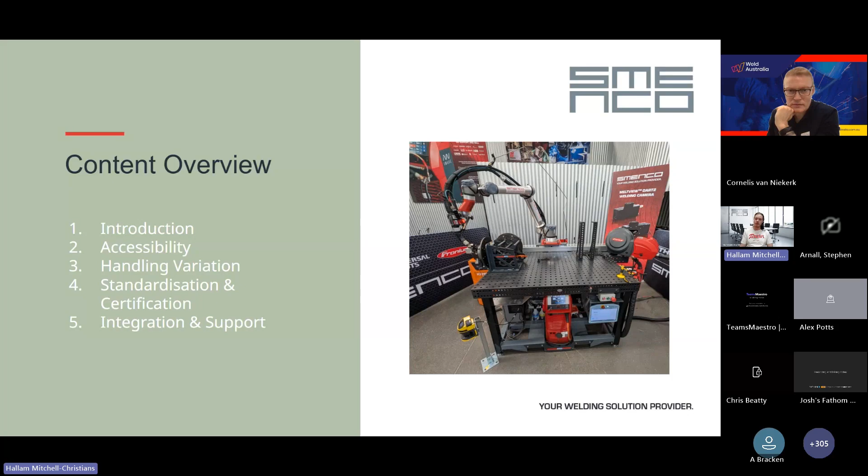And then finally, some challenges that we've been continuously seeing around integration and support. As a quick overview, we're here at Smenco. We're an Australian business, family owned, based in Melbourne. We are sole agents for a large range of welding adjacent products. At the very core, it's Fronius, and that tends to be with any of our welding solutions. But we also work very strongly with Universal Robots and technology partner THG to deliver turnkey packages for cobot welding, as well as selling to robot and cobot integrators across the country. And we've been doing that to robot integrators for the last 20 years.

And quick intro to myself. I am a robotics and mechatronics engineer. I studied here in Melbourne at Swinburne University. I've been in the manufacturing industry for about 7 years. And fun fact, I actually learned how to weld purely in the industry.

Are you on mute? You accidentally muted yourself, Hal.

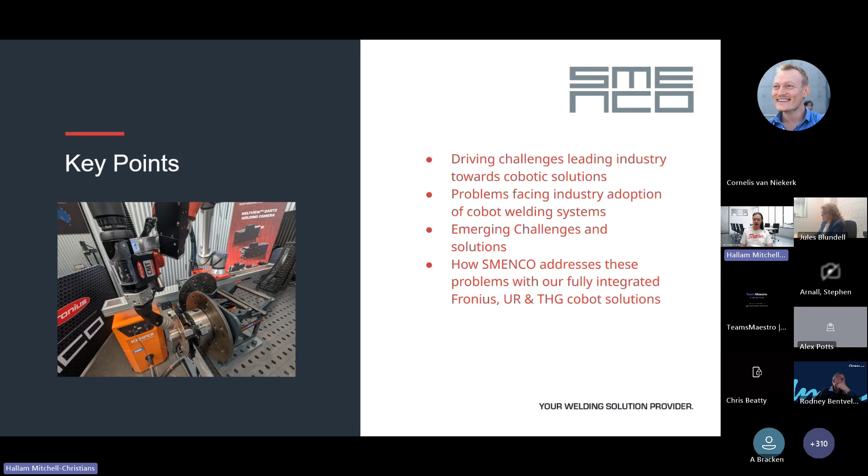The key points I'm going to be driving home with this are the challenges we're seeing, both from a solution point of view and an adoption point of view, and how we can address a number of these things with the solutions we're selling here at Smenco, and what's emerging with our product and technology partners.

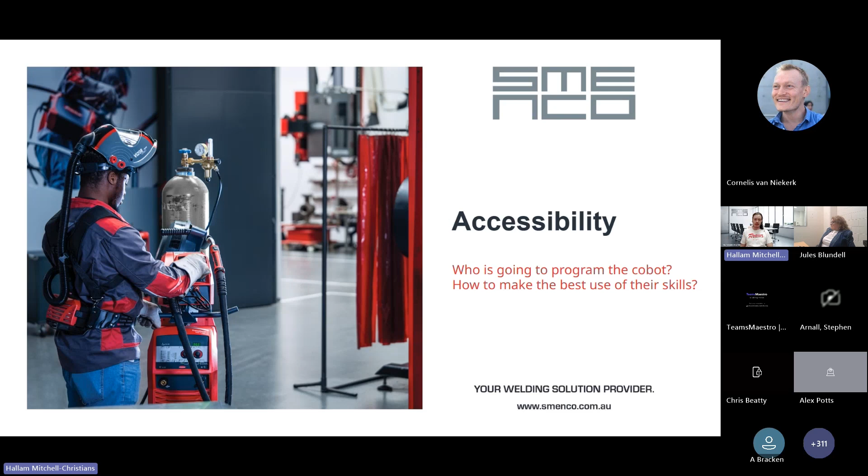So the first biggest point that's always really been the case with cobots is accessibility, and understanding who is going to be programming the cobot, who is going to be using it on a daily basis, and what sort of skills they need to actually make the most of it, and how can you leverage that.

Really, we still see the biggest driver around the adoption of cobots in the welding industry being the skilled labour shortage. Of course, there's a lot of different applications and factors involved there, but that skilled labour shortage is ultimately driving who ends up using the cobots inside businesses.

We find that a lot of our successful customers need to have someone that's first of all willing to actually take on that skill set, but the ideal target is someone that is a skilled tradesperson, welder, or boilermaker. There is some prerequisite knowledge there. They do need to be IT literate, but they don't necessarily need to be engineers, programmers, or anything like that.

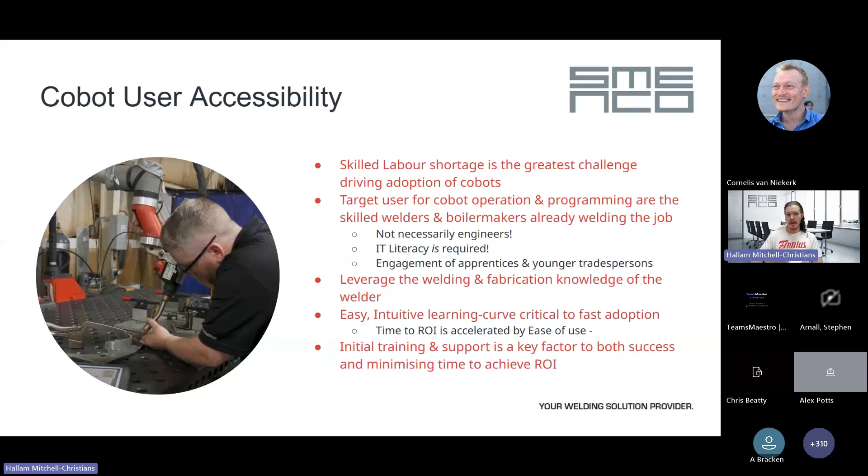Ideally, it's critical to be able to leverage that background of knowledge, that if they've been welding the parts a business is looking to automate, they need to be involved end to end of how that actually starts with the automation. A large part of this challenge of accessibility is a user experience or product design problem around how easy it is to actually learn and use the system, and that affects your time to return on investment.

I thought I had another slide in there.

That's right. Another area of challenges that we see as being really different from how industrial robotic automation addresses automation in general is dealing with high mix. Cobot welding systems are often sort of posed to slot in between manual operations and high-scale robotic automation, because with robotic industrial automation you tend to need low to no mix, high volume, high consistency, high initial cost in jigging to achieve consistent results.

This is all just to deal with challenges that manual welders themselves can visually, intuitively deal with. So this is the area where cobots need to be able to self-correct and deal with these challenges.

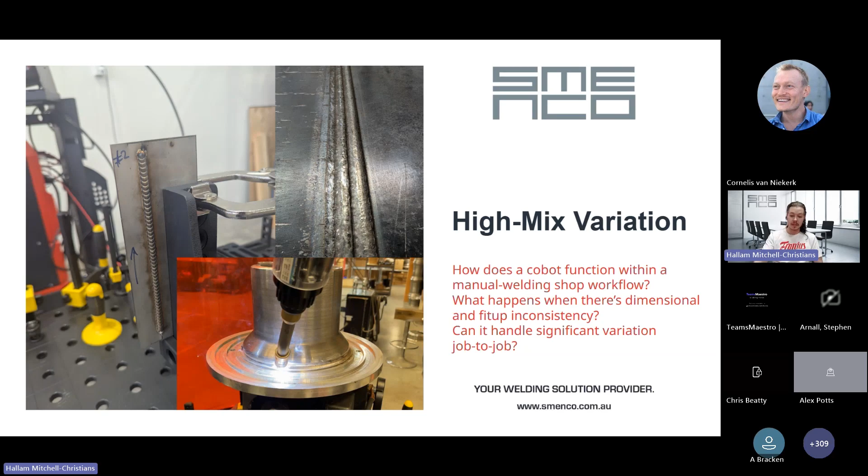As a result of this skilled labour shortage, so many businesses are looking to overcome the bottleneck that is welding before they can address any of the upstream processes that would normally really improve the consistency of an automated welding process. This might be CNC cutting, edge preparation, design for manufacture, that sort of thing. So the initial scope of welding with a cobot is often more challenging when it's a new business to automation.

Because they are using manual fixtures, they've got workpieces that are tacked in place, pretty loose fitment, and especially in heavy fabrication and some more general fabrication areas, you might have tolerances positionally for lugs, for braces, that sort of thing. There might be anywhere from 5 to 50 mil out of place from where it might be on a drawing or between parts, just because it's not actually critical to the overall design. And if that's something that is really easy to deal with from a manual perspective, and we're trying to introduce a cobot into that same space to just deal with that labour shortage and that productivity problem, we need to be able to deal with that on the cobot as well.

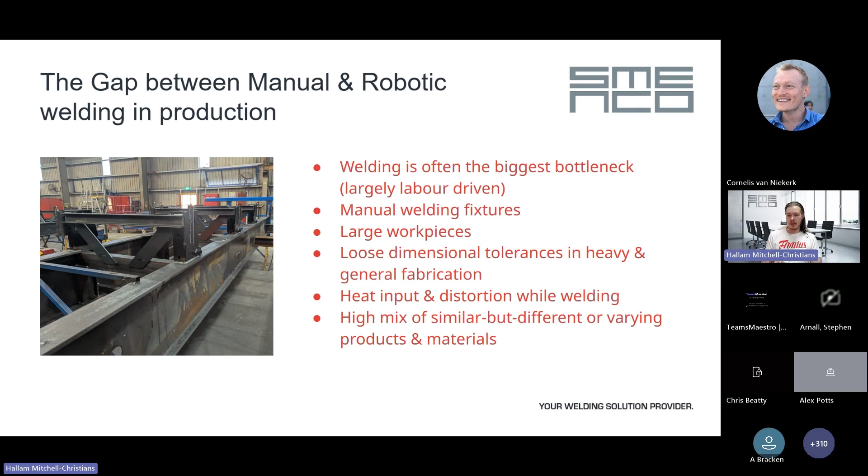Ultimately, there's a lot of different elements and ways that we can deal with these things. But one of the most critical ways we can deal with this with a cobot is just having an easy to use system that is still very flexible and can expand to needs. So if it's intuitive to use, with a low learning curve, the welder can teach the part and spend more time improving their upstream process before handing it to the cobot, versus just doing the repetitive welds themselves.

Another area that cobots really excel in, that industrial robots can't deal with at all, is being able to move a cobot up to a larger workpiece and automate large workpieces or small areas of large workpieces, that otherwise you would need an enormous scope of a weld cell to deal with, from both a safety perspective and a volume perspective.

Compensation systems are also quite critical here as well. Being able to use some more advanced functions that for us are available on the Fronius systems, on the CMT ready systems - using things like wire sense and touch sense to self-correct for variations in the fit up and seam preparation, and also compensate for distortion using seam tracking as you're welding along larger workpieces.

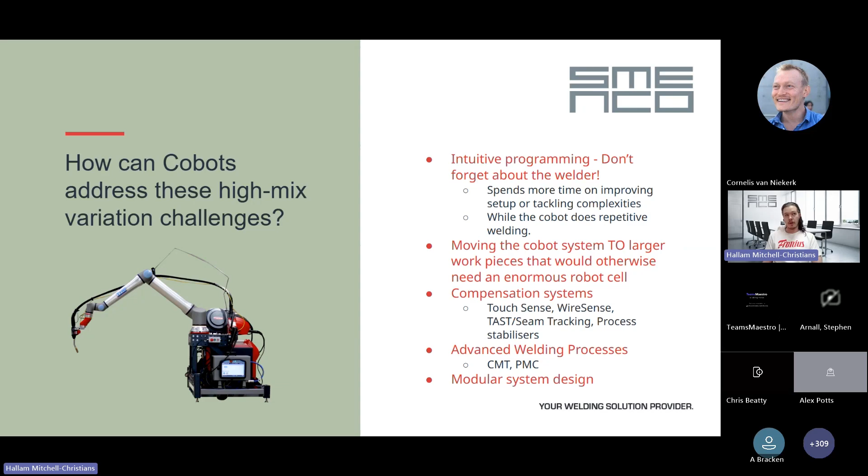Another more emerging area that we are seeing pop up more and more, not so much a blocker but a challenge in adoption for cobots, is standardization and certification around the welding process. This is more so around your WPS, and depending on what standards certain industries adhere to, in pretty much all those cases where they need to adhere to a standard, it's absolutely necessary to fully requalify procedures to move from a manual process to automation, which has a significant overhead when it comes to your quality staff, welding engineers, that sort of thing, to do that certification.

And that is something that we really need to be able to deal with, and we've got some emerging solutions here that we're focusing on going forward.

Utilizing more of the industry 4.0 platforms from Fronius, that's WeldCube. There's two variations here. WeldCube Air lets us reduce the amount of administration, management and complexity involved in creating and maintaining WPSs, and also deploying them to a fleet of systems for both manual and automation.

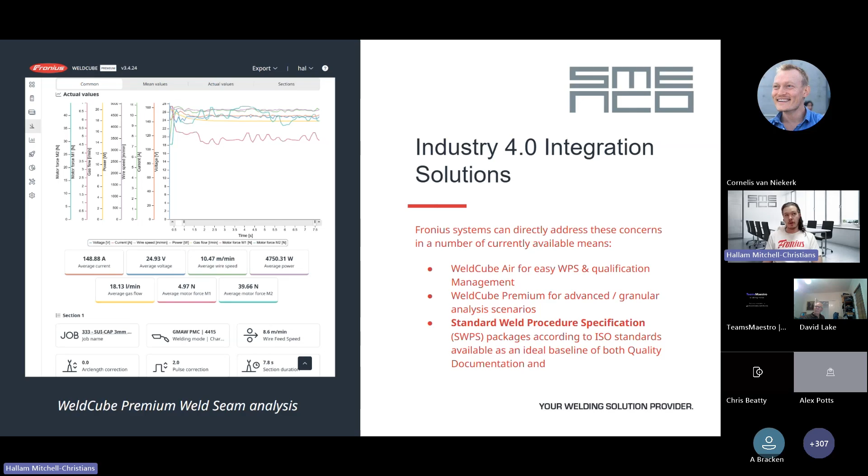And a final challenge point I want to discuss here is integration and support. Ultimately this is not a new challenge, but it's something that continues to evolve, and we still see it today. Companies new to automation rarely have the technical skill to integrate the robot themselves, and realistically, they shouldn't need to have those skills, from a safety perspective, and from just focusing on what the business does.

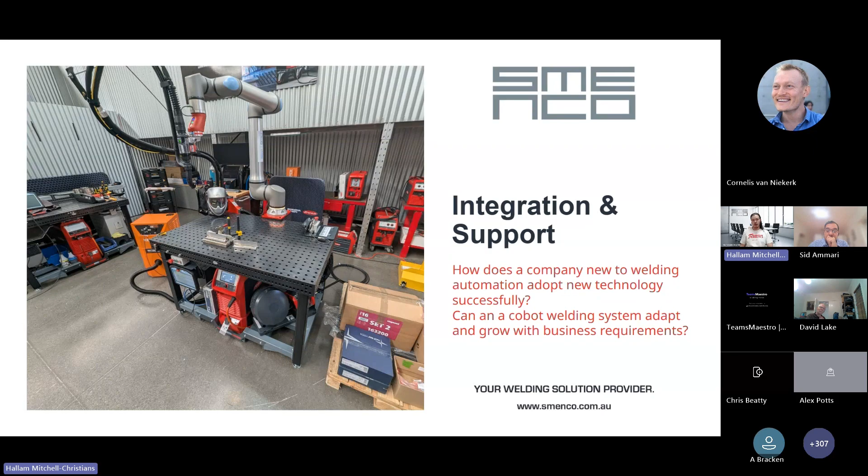Letting a business just focus on what they already know best, which is welding, fabrication, the manufacturing itself, not trying to reskill their guys just to set up a system. So support here is really critical when it comes to understanding that it's application first, it's welding first. It's not necessarily a robot problem, it's a welding problem. And if you don't have a welding process right, the whole system is essentially useless. So from our perspective, we always ensure that is the start point, making sure the welding is covered before anything else.

Another area where that initial integration and deployment makes a big difference is turnkey. Traditionally, turnkey might mean one size fits all. Our approach, and what we've found works best in industry, is that it's fully tested, ready to go on deployment, but still fully customized and flexible to application needs, exactly to the customer's requirements, and can be expanded as the customer experiences growth in their own knowledge, capability, and capacity to work with new work pieces, materials, and that sort of thing.

So that continuous integration support is essential to allow customers to expand, and to retain their staff as well. Making sure that the people we may initially train still feel confident and have the backing they need to move to some of the more advanced programming elements.

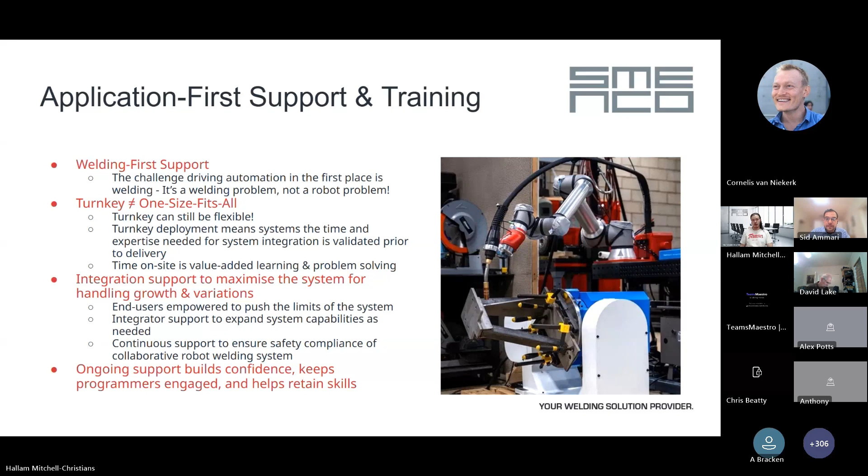So that ongoing support, on all levels, combined with the three previous points and a whole variety of other challenges we see, is absolutely essential. As a bit of a conclusion, the most successful customers we ever see are empowered to use their systems, empowered to take full ownership and do whatever they want with it, so that we can back them to expand their capabilities.

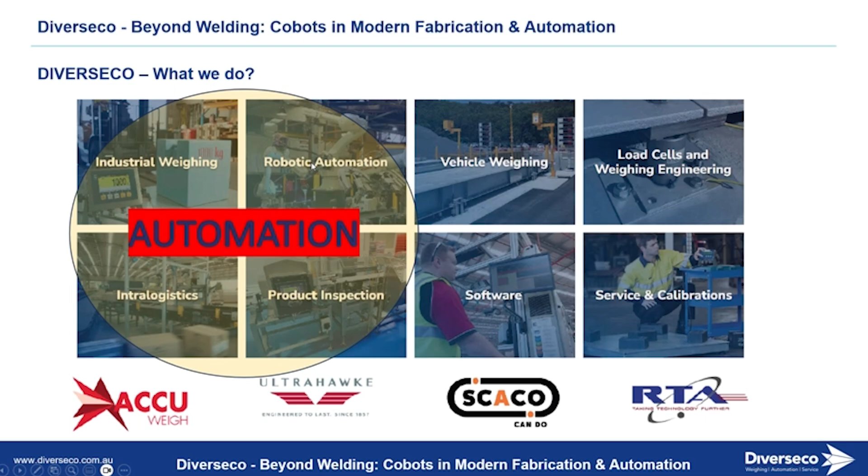Diverseco now, we are well known for two main categories. The first one is the weighing industry, with load cell product inspections, and the other part is automation, which falls under the robotic division. Within automation, we work in intralogistics, product inspection, robotic automation, and industrial weighing. Today we're going to focus on robotic applications, and more specifically cobots, as you all understand by now.

So a couple of words about the cobot. The first cobot was commercialized in 2008, so close to two decades now. And every year this market is growing bigger and bigger. The latest numbers say that in the next 5 to 6 years, we might 10x worldwide. So it's still a lot of application, a lot of things to do within the cobots industry.

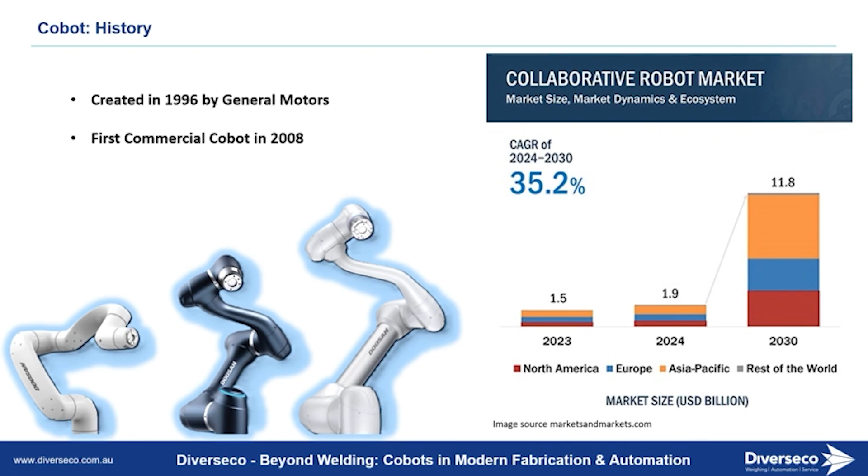But I do believe that in the past couple of years, maybe up to 5 years, the cobot has reached maturity. What do I mean by this? If you look at the capabilities of cobots 2, 3, 4, 5 years ago, we were pretty much limited by a couple of characteristics. A cobot can be defined by 2 characteristics: the payload, the capacity of the robot to lift a certain weight, and the reach, the capacity of reaching a distance from the center point of the cobot.

4 or 5 years ago, the limitation was, let's say, up to 5 kilograms payload to 1 meter reach. That's kind of what the cobot was done for. In the past few years, huge advancement has been made, and now we can have a payload capacity of 30 kilograms for our latest version of the P series, up to 2 meters reach. So it opens the door to a lot of applications that we couldn't do only 5 years ago.

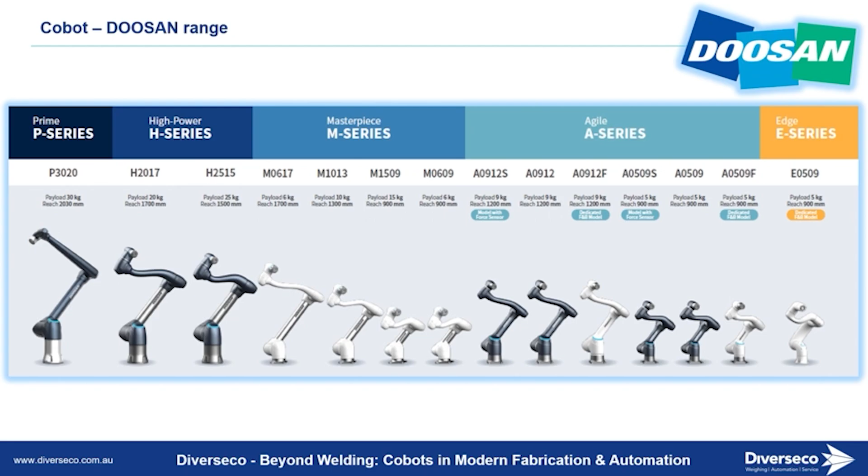So Diverseco, just to give you a last point about Diverseco, we are a true integrator. So we are a robotic integrator specifically, and we work with Doosan for the collaborative robot and Kawasaki Robotic for the industrial robots. So that brings me to a point.

What's the difference between a collaborative robot and a robot? The main differences is the payload and the safety. So those industrial robots, some of them can have a payload up to 2 tons. As I said, the Cobot is limited to 30 kilograms. But that's the limitation mainly. But if we respect that characteristic, then it opens up application, because the Cobot, by definition, can work with humans, as we all know.

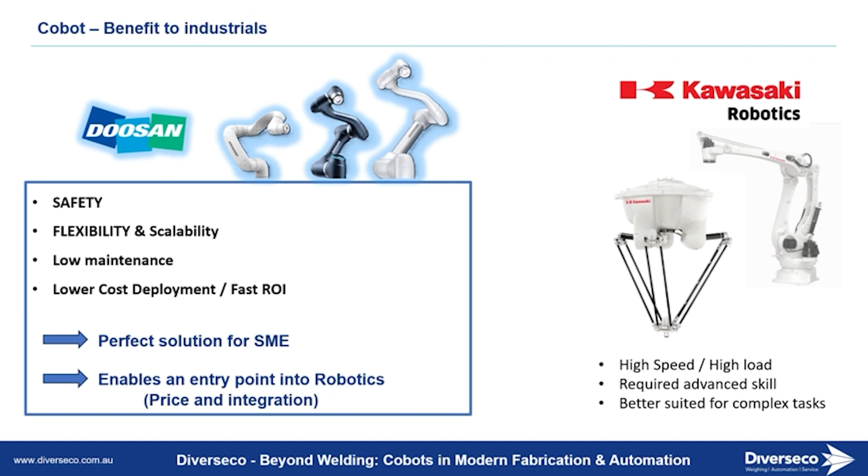I'm just watching the time, so I'm going to go really fast. Cobot is safe to use around humans, can work alongside humans, as long as we do a proper risk assessment. There is low maintenance. Those robots can run for 10 years without maintenance. And that allows for low-cost deployment and a fast return on investment, which means it's a perfect solution for a small or medium industry. I used to say that a Cobot is perfect to enable small, medium, even large companies into automation. If you have a fully manual production and you want to automate, starting with the Cobot is the way to go.

Before, someone asked if a Cobot can do one task. Yes, it can, but is it a good way to do it? Maybe not. A Cobot will be perfect for repetitive tasks, labor-intensive tasks, and potentially a non-work-safe environment as well. So when we implement a Cobot into a factory, we have to design the task for the robot, and that design takes a bit of time. So if it's doing only a one-off task, there's no actual advantage. The advantage is when the task is repetitive. You have to do the same task one time, two times, three times, days after days, week after week, month after month, years after years. It can be many tasks, but repetitive tasks in themselves. That's actually when we install a Cobot into the factories.

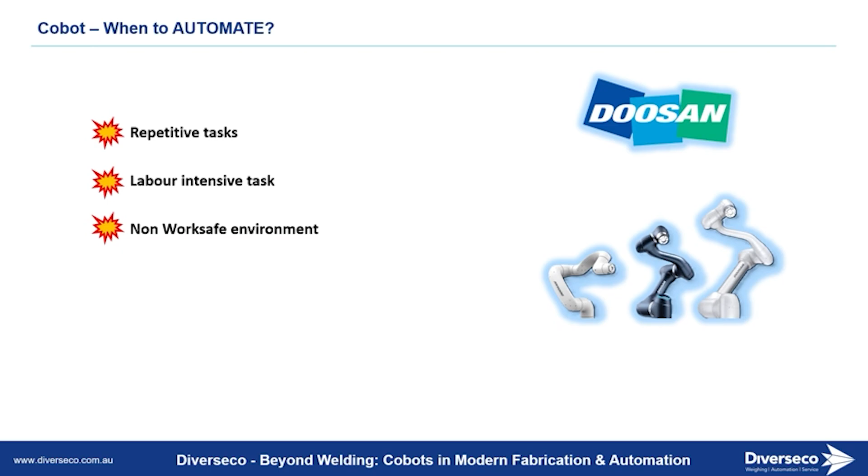Let's go through applications. We all talk about the weld application, which we all know by now.

So we have this product here where this welding machine is an out-of-the-box ready machine. We can pretty much go to your factory, set it up, and within a day you can have a running welding robotic machine, ideal for parts up to 2 meters long or within reach around the robot. And we can do MIG or TIG. We actually partner with Weld Australia and BOC to build that machine.

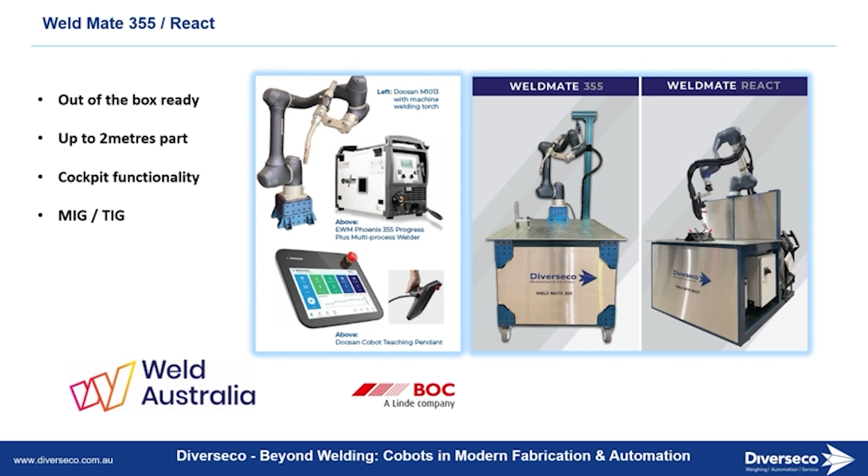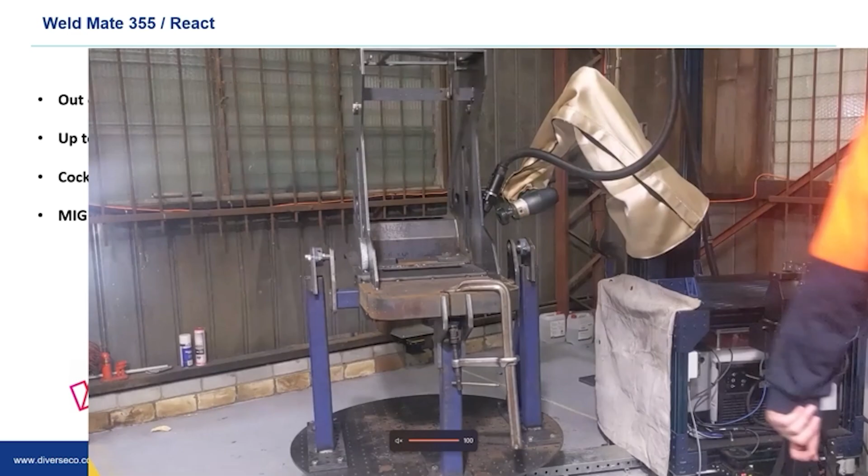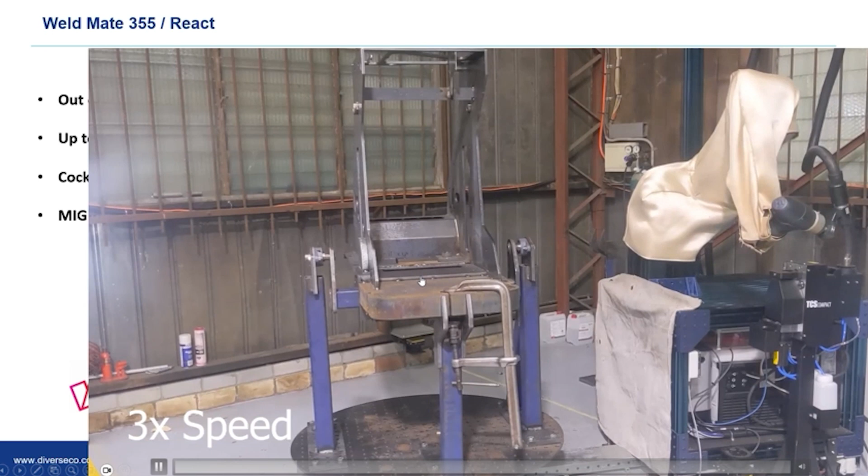I have a small video here to show you. Today I'm going to show you a few videos, just going to turn off the music, and it will allow you to visualize what the cobot can do. Here we have a part where we want to do welds all around it. So the robot starts by doing one side, goes along and performs all those welds, and then the robot can actually turn the part to do the other welds. Again, ideal for parts up to 2 meters long.

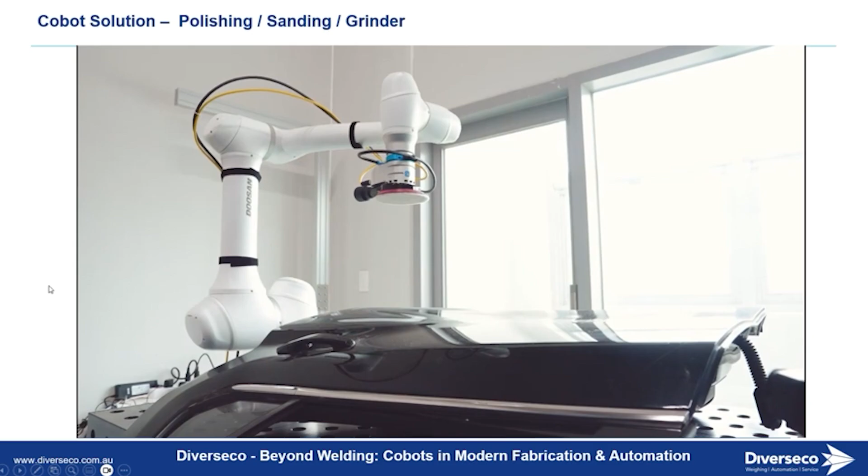Okay, let's move on to different applications. Here, for example, another application we can automate via a cobot is polishing, sanding, grinding tasks. Again, those tasks can be repetitive, labor-intensive, and potentially non-compliant for safety. If that's the case, using a cobot makes sense.

So we literally replace the arm of the operator or worker with a cobot, and then you can polish, sand, or grind a part. The good thing about the cobot is they have a torque-sensitive function, so it can apply a certain amount of pressure, let's say 1 or 2 kilograms, to the part, and then you can control the polishing, sanding, and grinding functionality.

Next application, here's a video.

Okay, so now the cobot can bring the polisher to the location we want to polish and then go along a predefined part. Again, we can monitor the pressure we apply to the part.

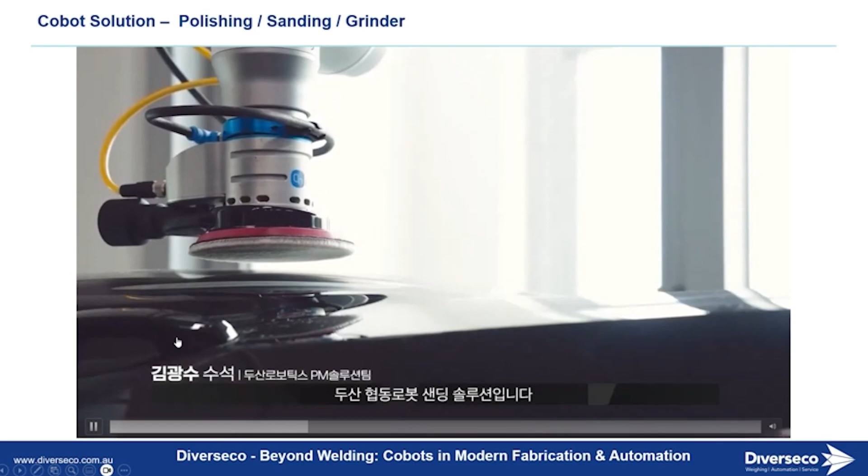Next application here, another one you might want to hear about, is machine tending. Machine tending is the action of putting a part into a CNC machine and retrieving that part. This task is highly repetitive and can be labor intensive and potentially non-work-safe compliant. I've done it in the past where we were short of staff and had to build, I think, 150 parts via a CNC machine, so I had to stay in front of the machine, load the part, wait a couple of minutes for it to be processed, and pick it up - doing that 100 or 200 times during the day.

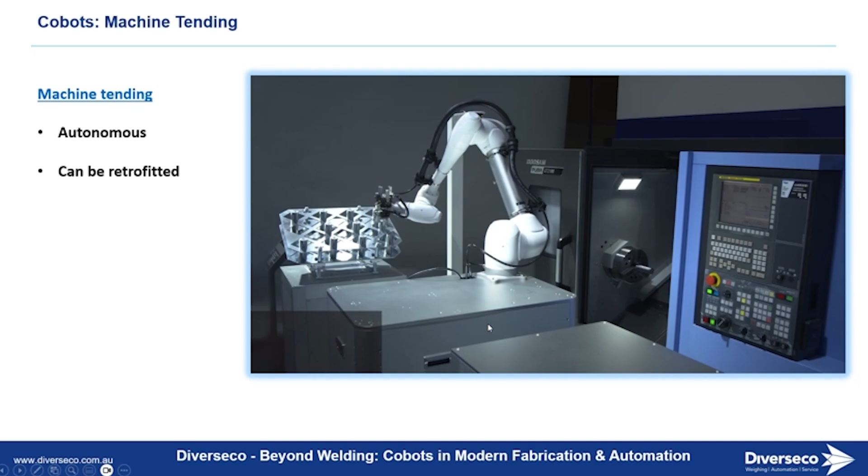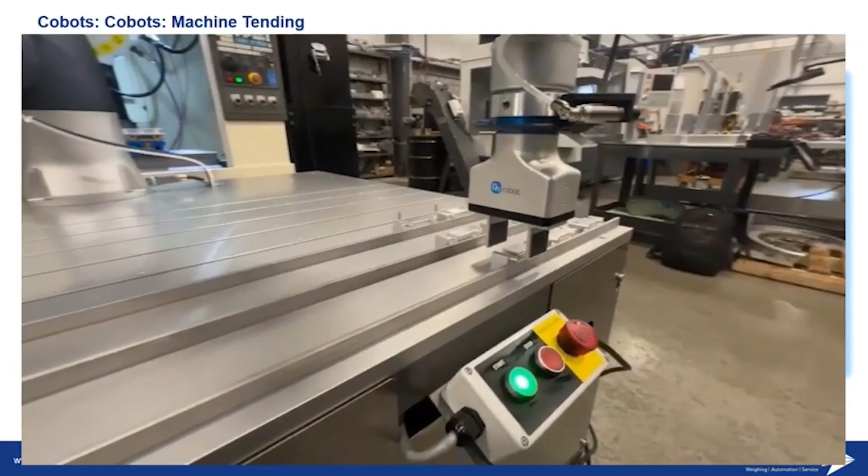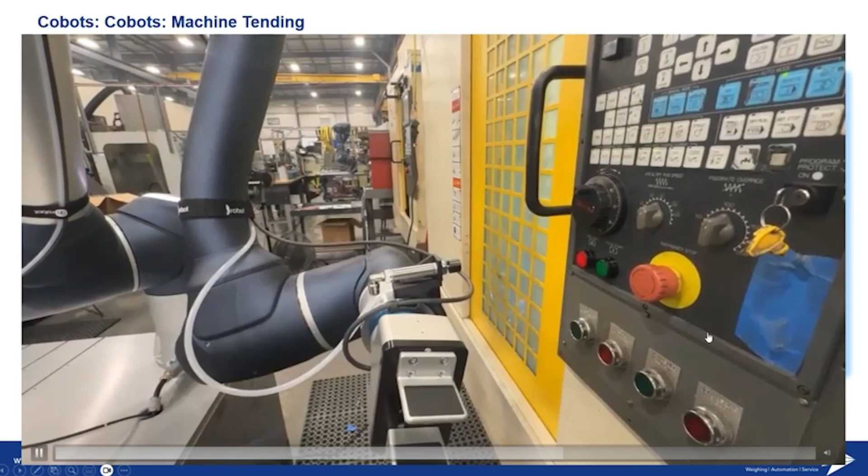Very annoying and boring task. So I have a small video to show you. We automate that process. For example, here that machine is an old machine that is not automated, so the cobot can actually open the door and press the button. We can design that type of functionality to work with a current machine you might have. We're loading the part, closing the door, and pressing a button to start the process. Then when it's finished, we press the button, open the door, pick up the parts, and put them back into the tray, and so on. I've seen machines that have 100 small parts in them, and you can do it one after another.

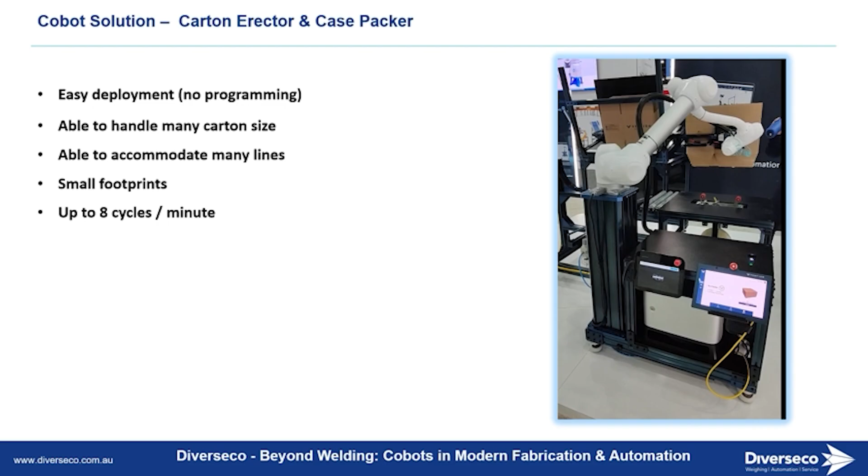Another application, I'll go really quick since I'm mindful of the time, is a carton erector. Here the application is to open the box for a production line - it's a carton erector and case packer. We have to fill up that box, so we have a robot to open the door, and another robot that can fill up the box. Again, it's repetitive, we can do it over and over again, with different sizes of box, different parts, different speed. We can make them custom for you. I won't go through the video, I don't have the time unfortunately.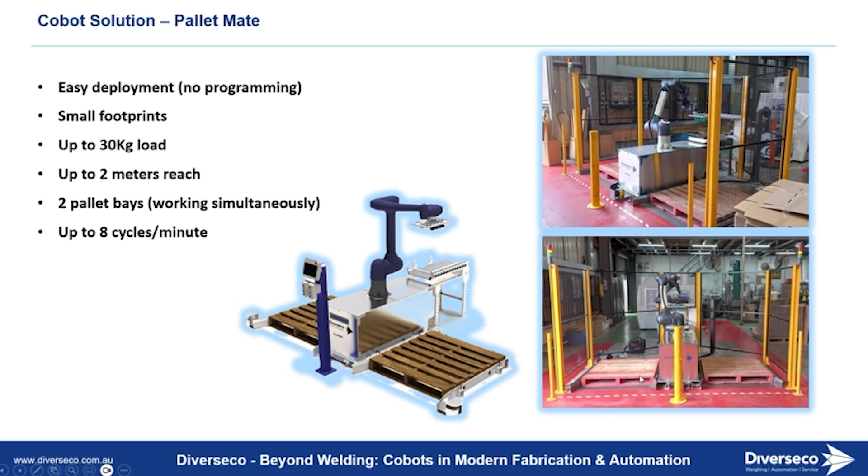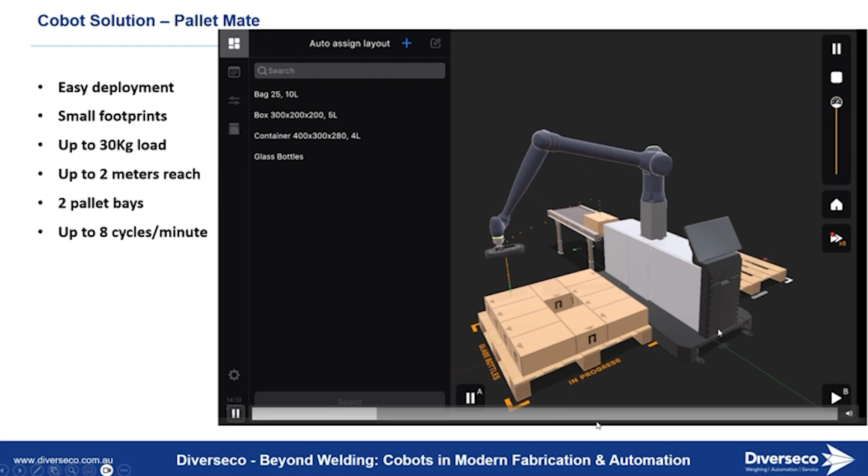Quick word here - Diverseco, as I said, is a robotic integrator first and foremost. So we can actually design and simulate applications for you. By designing these, we can confirm the speeds, the rates, and other characteristics of the application. We supply that as a proof of concept to our customers. Next one - sorry, go ahead. Another application for labs.

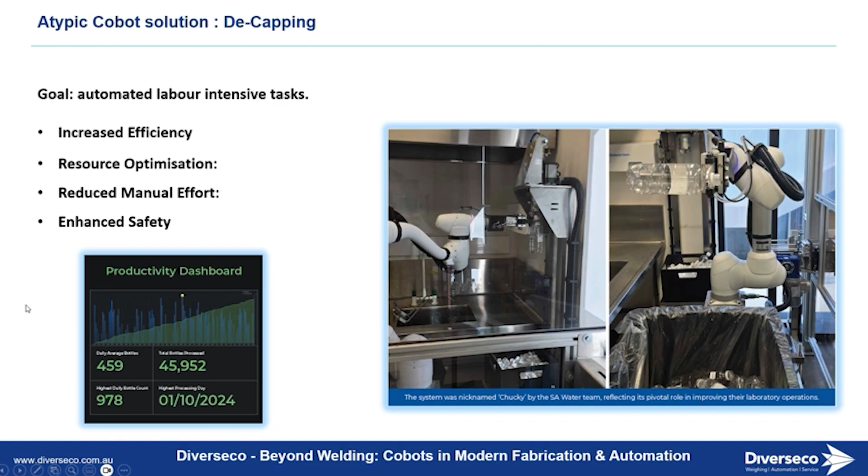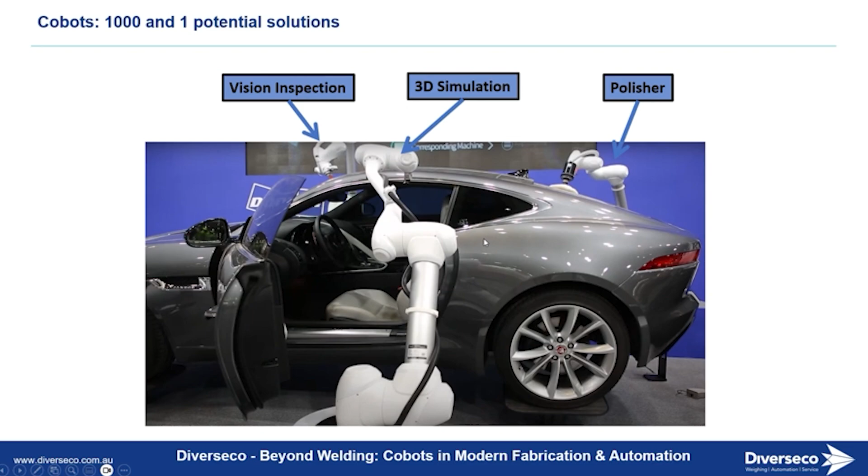The last thing I wanted to tell you is that for highly complex parts, we can have different robots working together. In this application, obviously a demo, we have a polisher, a vision inspection, and we're checking that the part - the car here - has been built correctly. But the next application is the one I really wanted to show you.

So here it is, I think we've gone through a lot of applications. As I said, the idea here is to show you what a cobot can do. A cobot can work alongside humans in a safe environment upon a risk assessment. If you have any questions, please reach out to me - you have my contacts on the screen right now, or reach out to Cornelis and I'm sure he'll supply you my information. Thank you very much.

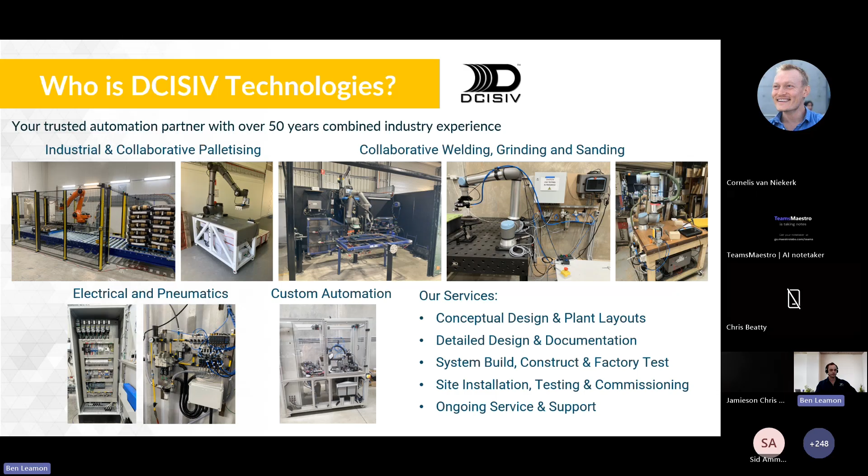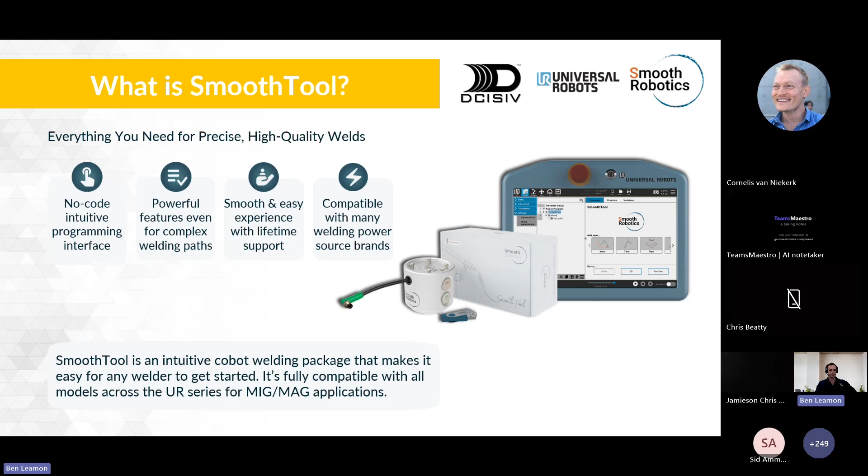So firstly, what is SmoothTool? It's a hands-on, intuitive weld programming interface, and you don't lose advanced control capabilities. It works with power sources from all major brands and comes with a lifetime license that includes future updates. The real point of difference with Smooth Robotics is that they're a dedicated welding software company.

The existing feature set is quite comprehensive, and it's just in the last year they've released touch sensing, surfacing, and seam tracking. The capability keeps expanding quickly because this is their sole focus.

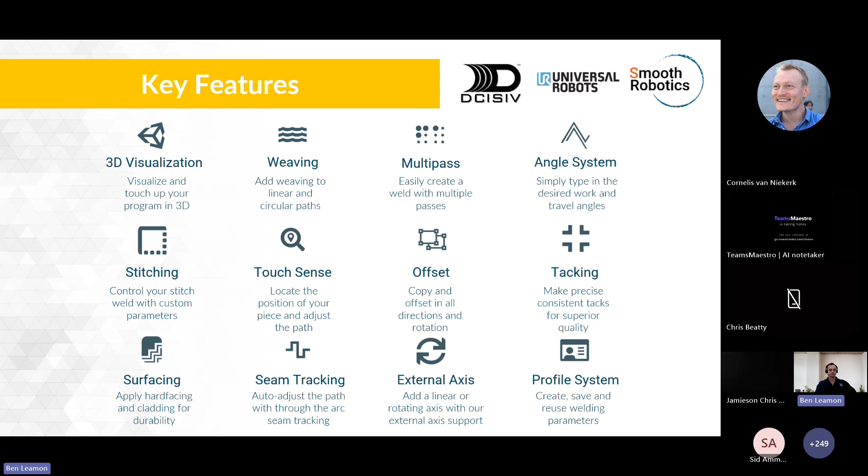It's important not to think the robot is a magic wand - it doesn't matter what brand or software you're implementing, the features will only matter if someone's willing to use them. So you need to find someone who wants to make this work. Without that person, the robot will most likely sit idle, which is not an outcome that we want, or that you want either. Somebody needs to champion the cause, learn the ins and outs, and persevere through challenges to find solutions - this is particularly relevant for welding.

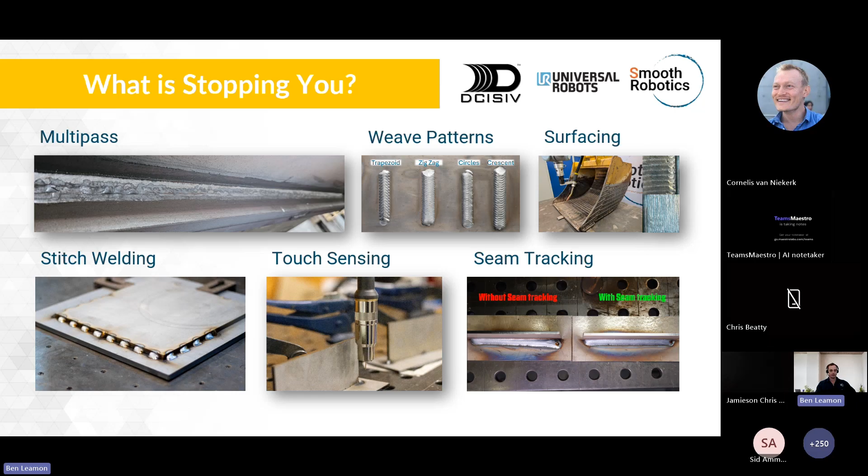The robot should just be treated as another tool in the workshop. So is your team ready for this? We've got direct feedback from our customers that they recommend dedicating someone for at least 3 months to focus on jig building, programming, and production implementation as their core job, not as a side project. They also insist on training multiple people in each aspect of setup and use, and recommend having a plan for who's going to program the system and who's going to operate it.

Programming does require skilled welding knowledge - someone who knows what parameters to adjust when things aren't right. Important to note this person doesn't necessarily have to be good at welding themselves, it's the knowledge that is required. So there's a key difference there.

But once programmed, a lower skilled operator can run the system, potentially in half the time of manual welding with better quality results. The goal here is to free up your skilled welders to then oversee production, provide training, and focus on quality improvements. So you want to leverage the existing skills and not replace them, which is important for your team to understand before starting out.

Then the next thing is a specific plan to achieve ROI quickly. What specific parts are going to give you a quick win? What batch volumes make sense? How much time can you save per component versus programming time?

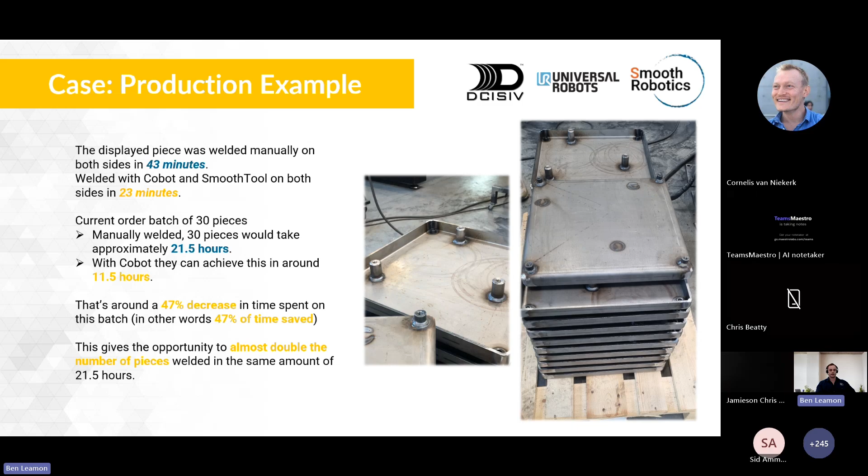Once you've got a plan for your ROI, you need to start thinking about the process flow. How are your parts going to be positioned repeatably, or do you need some more advanced software to track? How are you going to ensure parts are manufactured within tolerance? How do you move parts in and out of your cell? How and when are they jigged and tacked? And most importantly, how can your people be productive while the robot welds? Because that's where you're going to get your ROI from.

You need to account for the setup time, loading, unloading, and the weld time. And if you do get all of this right, you can start to multiply your capacity without increasing pain and headaches.

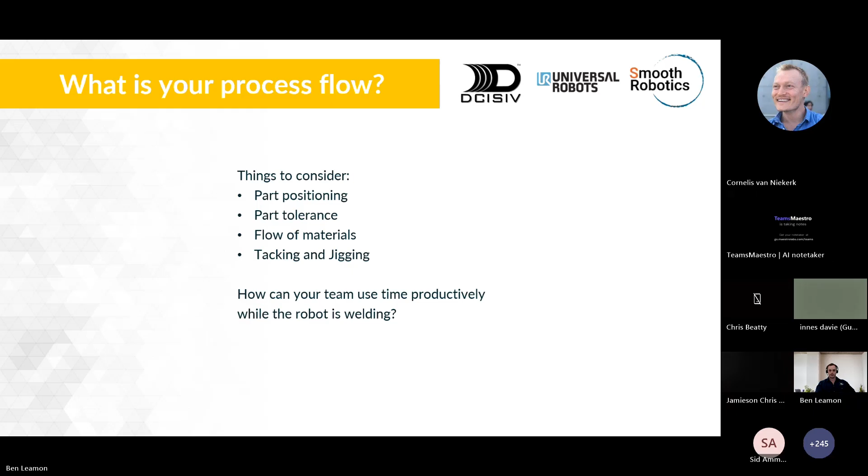So approaching programming, you want to do it methodically. First spend time setting up jigs correctly and trialing them before you go to the robot. Then focus on getting the weld parameters right, and don't worry about tweaking robot speeds and angles until later on. To get the robot travel speed estimate, you can just do that with a manual weld along a set distance and time it. Then think about controlling the jig location and designing reference points on the jig so you can validate that the jig is in the correct position before you start. Then plan your weld sequences to spread the heat and pause to cool down if required.

If you're starting out, I recommend learning the technology with simple applications, and only consider touch sensing and seam tracking when it's essential, or if you just can't get your parts positioned repeatably. Touch sensing and seam tracking are great features, but they do add some programming time, run time, and an extra layer of complexity.

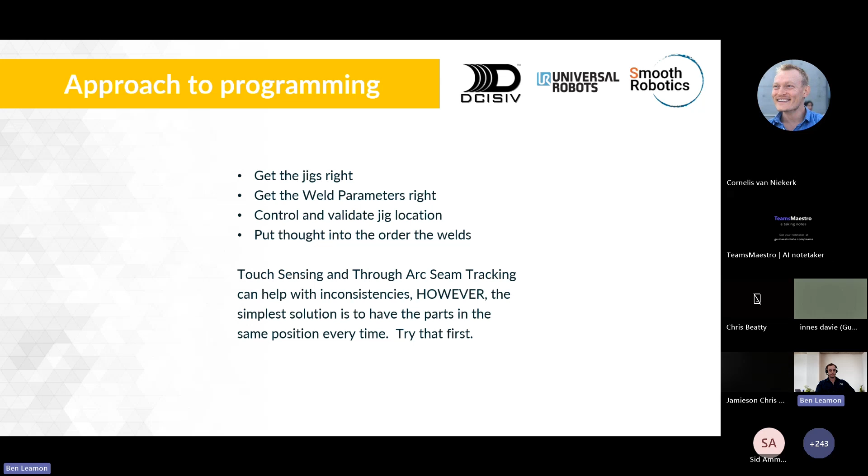So I don't want to overwhelm you with the challenges, however I do want to make you aware of them. Everything I've discussed, we consider throughout our project scoping and delivery, and we're here to try and make the process as smooth as possible for you. We can provide access to the welding experts, and Smooth Robotics also have a full suite of online support for the programming. And our DCISIV team are only a phone call or email away, and will always help troubleshoot problems to the best of our ability.

If you follow these principles and commit as an organisation with a culture of perseverance, I'm confident you can successfully implement robotic welding and achieve ROI. The technology works, the success comes down to execution. Feel free to reach out to me if you've got any questions. And I do have a short video, a practical example of how a cobot and a welder can work together, if we've got time.

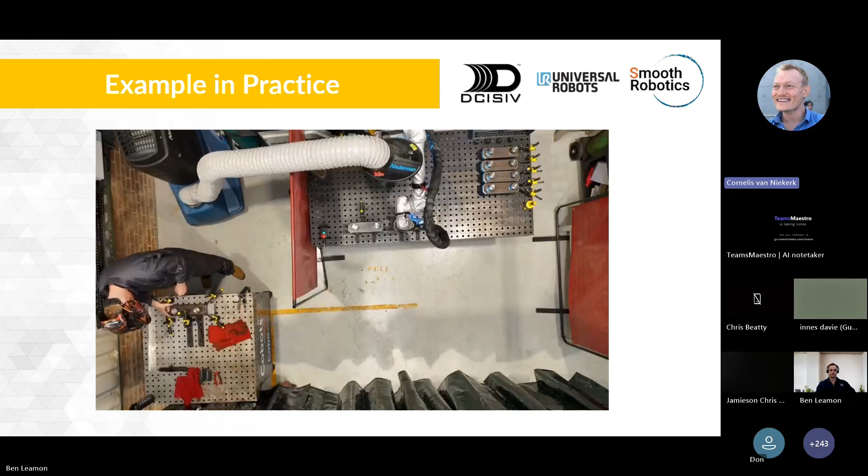Yep, so just one or two questions we'll address real quick. What is the normally allowed tolerance that a robot can adjust? If you're not using your touch sensing or seam tracking, you probably want to be accurate within a millimeter. Outside of that, you need to be sensing or tracking the seam.

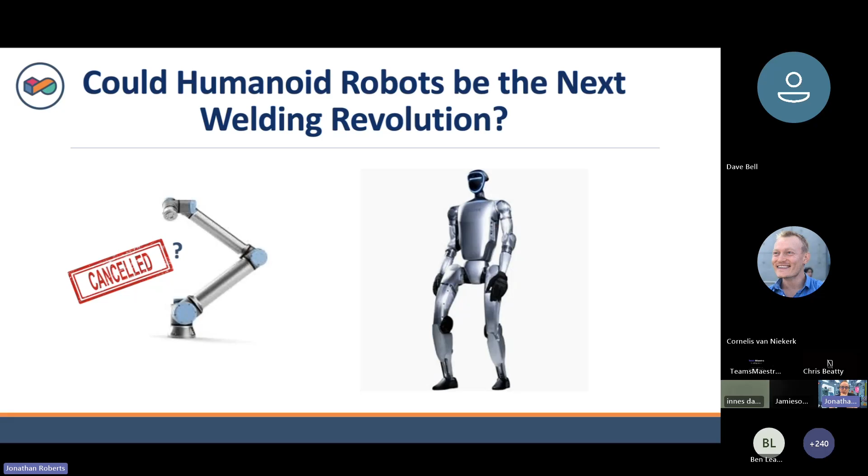We're starting to use those in some of the places where we'd use cobots, just to understand what's going to happen. We've got our first humanoid robot at QUT - you can see it here. This is the day it arrived, walking into the building. We've got another two on the way.

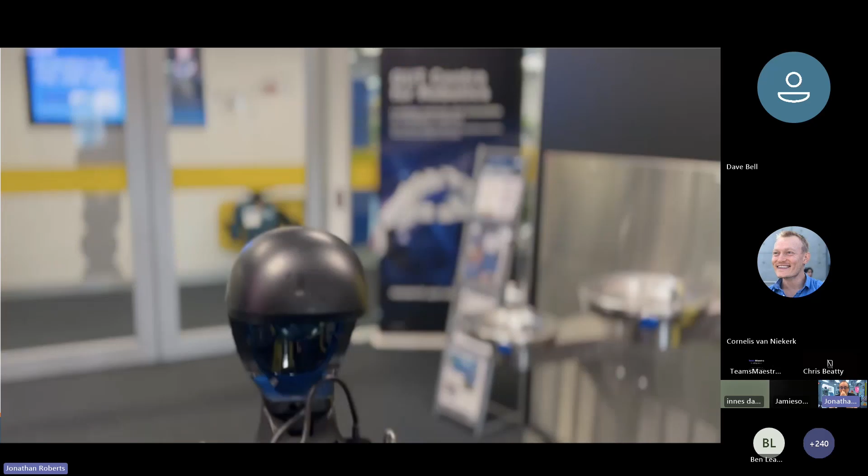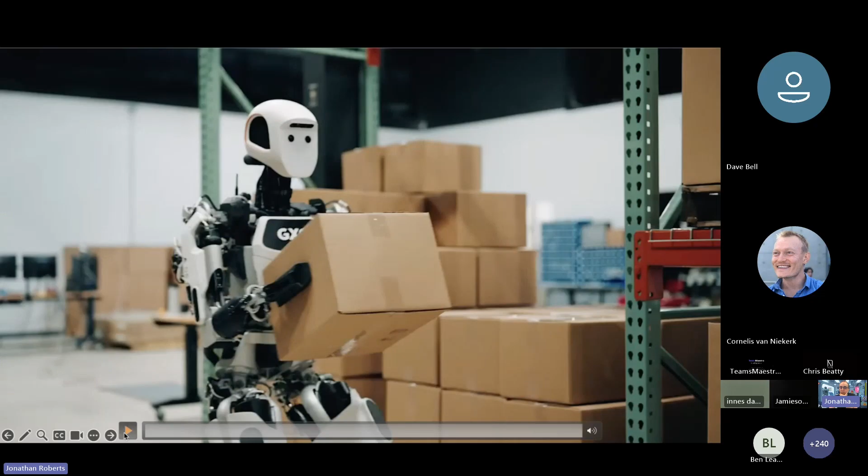We're going to be doing all sorts of experiments with these robots to compare them, particularly in their flexibility of use against cobots. As you're probably all aware, because you'll see all these things on LinkedIn constantly, these robots are becoming very capable.

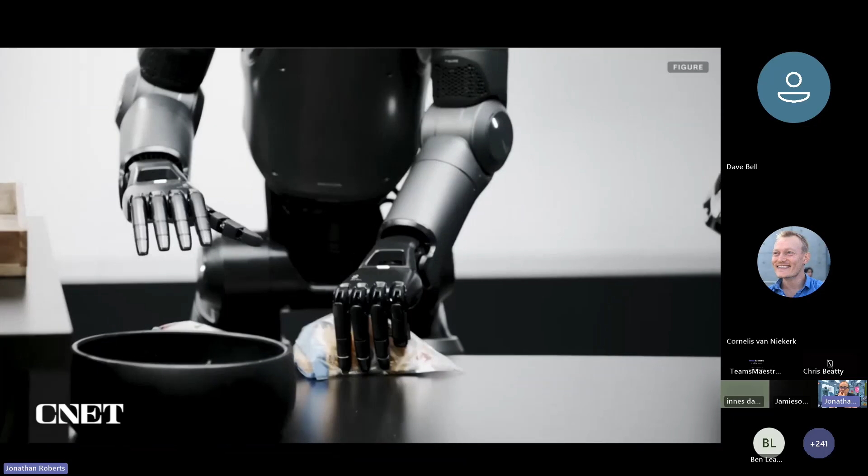About 6 months ago, we thought a lot of these videos were fake. It turns out they're all real. And this video reel I've got here was made in May, and it's all very out of date now - some of these same robots can do backflips. They can do anything, it's very, very impressive.

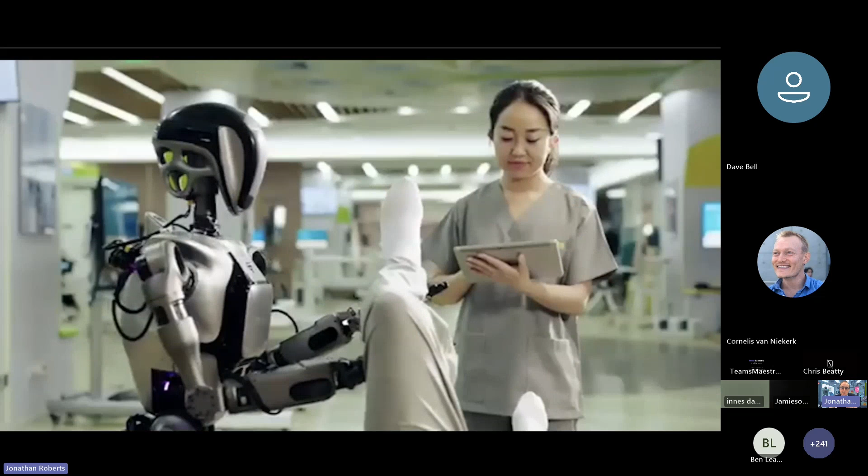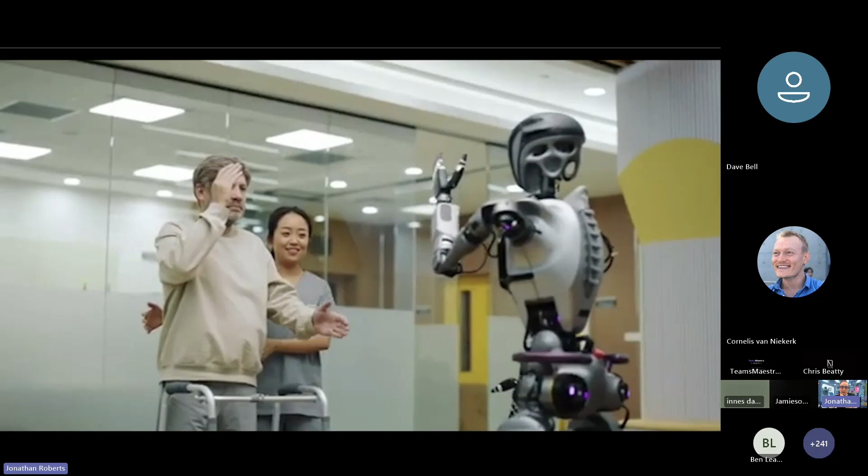What these videos don't show you is the repeatability of some of these tasks. Obviously some of these things don't work all of the time. We had a seminar by one of the companies featured here - I won't say which one - which said their completion success rate is about 40% in tasks at the moment. So they've still got a long way to go, but it's showing what's possible.

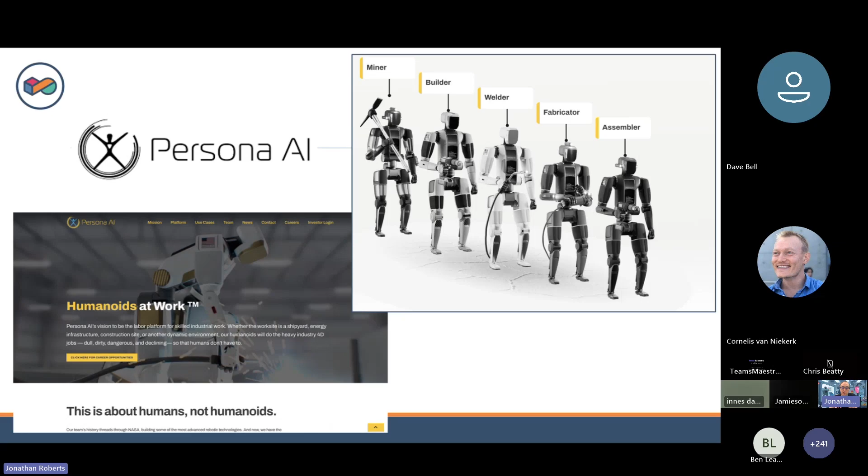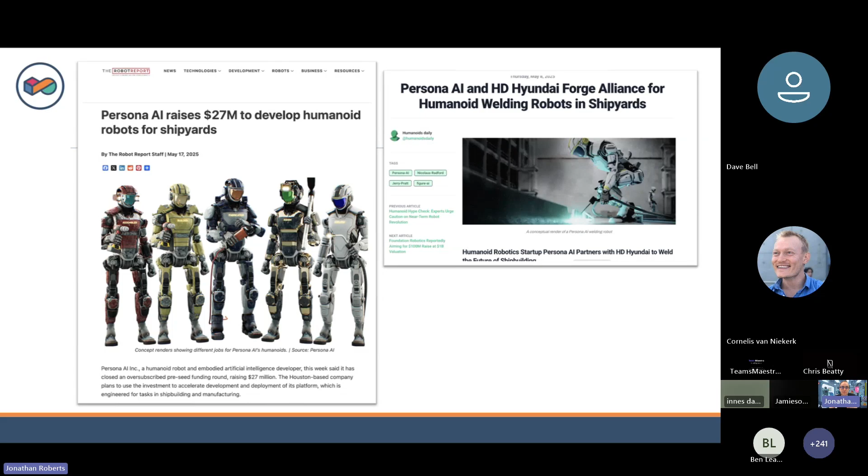Welding specific, there's a company in the US called Persona AI who is going to sell humanoid welding robots. They've got a lot of investment, they've signed up with some shipyards recently, and they're oversubscribed with investors. It's very clear that humanoid robots will be used for welding very shortly - it's all coming, because the welding task looks like it's being solved.

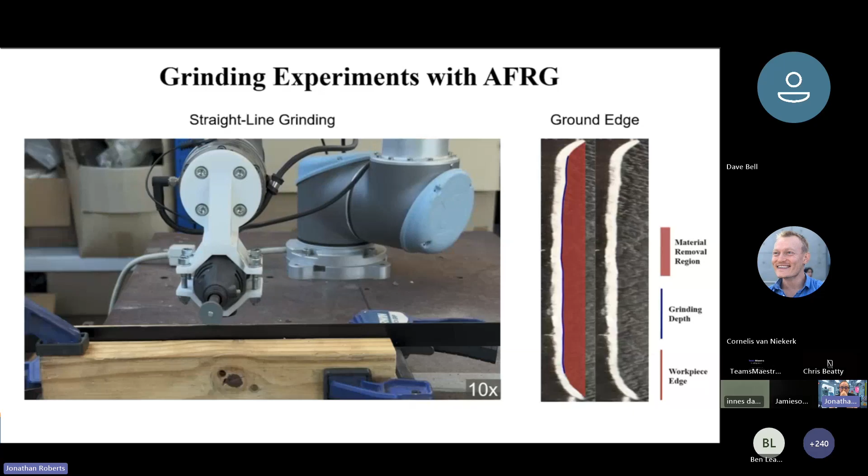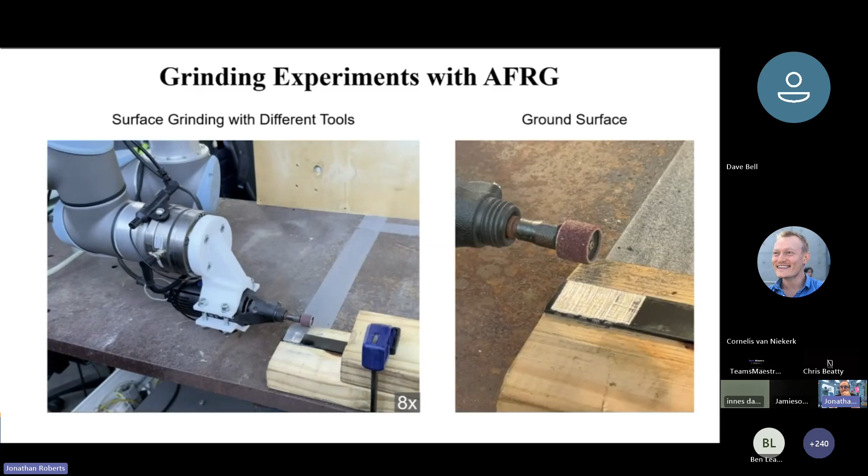We're working on grinding, which of course is adjacent to welding and is often required. We're starting to do experiments with cobots on cheap audio feedback for grinding tasks, and our next job in the next few weeks is to switch this to humanoid robots. We should be demonstrating similar capabilities on humanoid robots by the end of the year. This looks relatively straightforward - of course there are other technical issues to solve, but we are getting there.

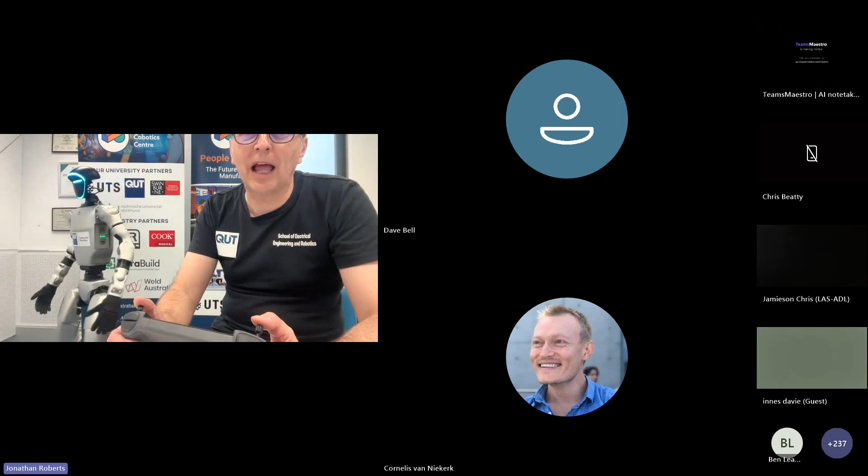What it's not so capable of yet is doing very good things with its hands - that's the latest challenge. It's also not very good at planning, so a lot of the research activities will be based on planning of the task, and also the robot itself recognizing when things haven't worked and when it's got to replan. These are the kind of active research areas.

Okay, all right, so I've got a dash in 2 minutes - hopefully that was quick enough, Cornelis. Thank you very much, Professor, that was fantastic. If I knew you were in such a hurry, I would have put you earlier. That's all right, I'm always in a hurry. Exactly, it's the nature of being important.

But thank you very much for that, John. Do you have time for a question, or do you have to dash? Yes, I've got 1 minute. So, question - let's have a quick look at the chat. Does anyone want to ask a question directly to Professor John?

Hey, quick question. I had a project in uni where we had these Motoman or something, these robots with 2 arms back in the days. So I came to the conclusion, why use an expensive 2-arm robot when you can use 2 simple robots, right? The same with the humanoid. It's great to have that, but is it really efficient?

Replacing simple tools, because these are going to be mass produced, this is where it comes in, so the cost is going to be relatively low. This one you see behind me isn't cheap, it's $45,000, but for that you get the 2 arms, sensors, it can walk around, it can do all that stuff. When they're mass produced, they're going to be a lot cheaper than that.

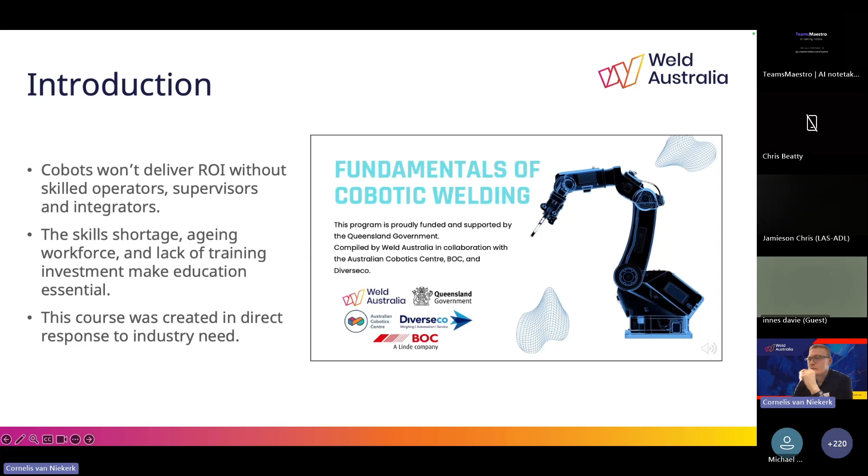Now this course was created directly to address these problems in our industry. It's a fit-for-purpose course, but what I want to highlight is that this is a free course offered by Weld Australia. It's a short course, probably around 2 to 3 hours long. It was created with industry, with educators, and with actual integrators, and it covers the fundamentals of cobotic welding, starting with welding fundamentals and how cobots apply to that and to the automation of welding. It'll take roughly 2 to 3 hours to complete the entirety of the course.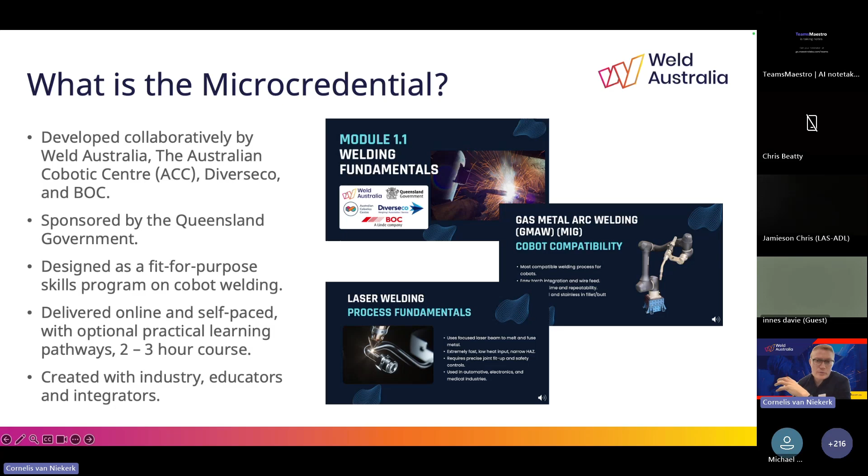And like I said, it is free, but it is free only up until the end of October. So if anyone is interested in doing this course, I would really encourage you to do it as soon as possible. After October, the grant money given by the Queensland government for this course basically runs out, and we'll have to start charging a small fee for it.

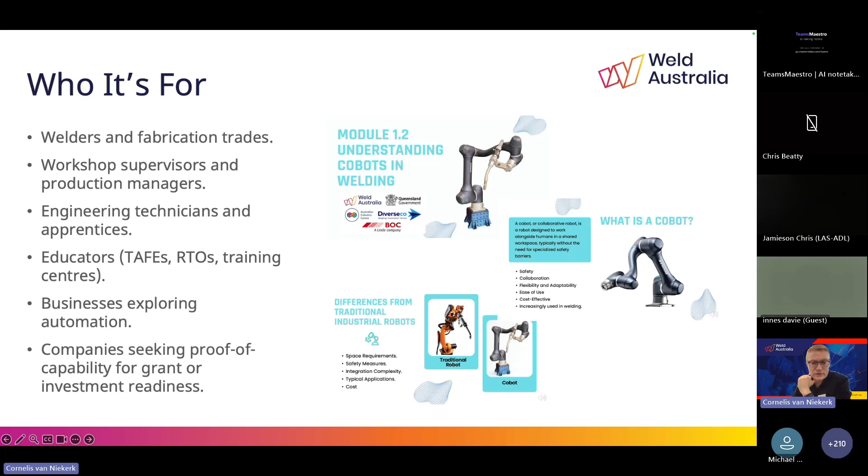But who was it made for? It was made for welders and welding apprentices, but also for the decision makers of certain businesses. So if you have a peripheral interest or even just peripheral knowledge of cobots, how do you go from that interest to realizing the need for automation to actually purchasing and acquiring this type of technology? The course takes you through that decision-making process, what you need to be aware of, what questions you need to ask of your tech supplier or integrator. So it's for the whole broad spectrum of welding professionals, from welding apprentices right up to business decision makers.

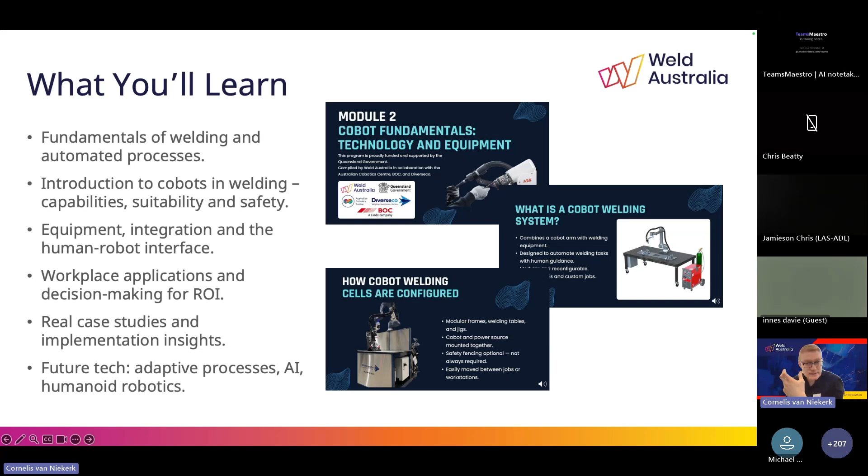What you'll learn is structured around 5 modules, each taking around 20 to 40 minutes to get through: starting with the fundamentals of welding and how that relates to automation processes, introduction to cobots in welding, its capabilities, but more importantly what it can and cannot do, equipment integration, what the setups are like, what human-robot collaboration truly means, workplace applications and decision-making, and a few real-world case studies of where cobots have actually been beneficial to certain industries. Cobots offer a fairly lower entry point into automation when compared to industrial robotics.

Roughly 30 to 50% less upfront cost when compared to industrial robotics. And like I said before, about a 6 to 18 months return on investment, depending.

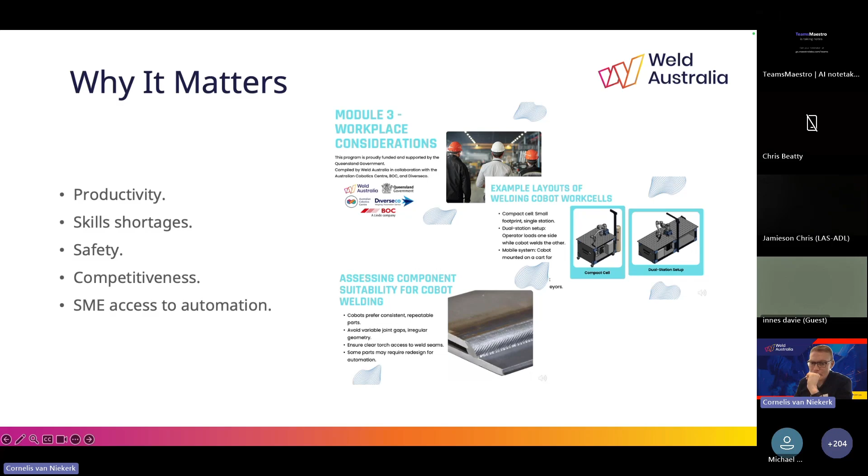Other good things about cobots that the course also highlights are things like the safety aspects. As Sid mentioned earlier, there's no need for safety cages due to the collaborative nature of the robot, due to the sensors inherent in the robot. It also, for instance, takes your welder out of the welding fume, the welding plume, especially in the downhand position when you're welding. So that perhaps could negate the need for PAPRs in some cases. But yeah, it just highlights all of the good and the bad around cobots.

How to access it? There's a registration link in the webinar invitation that I sent out to your calendars. But also, please feel free to just send me a direct email saying, 'Hey Cornelis, can you send me the registration link for this?' If you want to enter yourself, or even if you want to enter your entire workforce, we're more than happy for the numbers. We're also looking for more partnership opportunities with TAFEs and RTOs and other employers going forward after we have finished running the free part of this course, which is funded by the government.

Right, but yeah, that's pretty much it. So a final message regarding it: Australia needs a practical and more affordable solution, especially with regards to the training of our personnel. And a free solution like this is perhaps a good starting point. Now look, this course is not going to teach you everything that you need to know about cobots. It does touch on more technical topics as well, such as how does qualification work, which standards are at the moment relevant in procedure qualification, personnel qualification, and finer details like that. But yeah, it's not the beginning and end all, but it's a good start.

So yeah, please feel free to drop me an email if you're interested in it, or just have a look at the link in the invitation, and I'll register you. Usually we register people within a week after reaching out. And yeah, like I said before, the course only runs for 2 to 3 hours in total. It's self-paced, it's fully online, and it's free. So I'll finish with that.